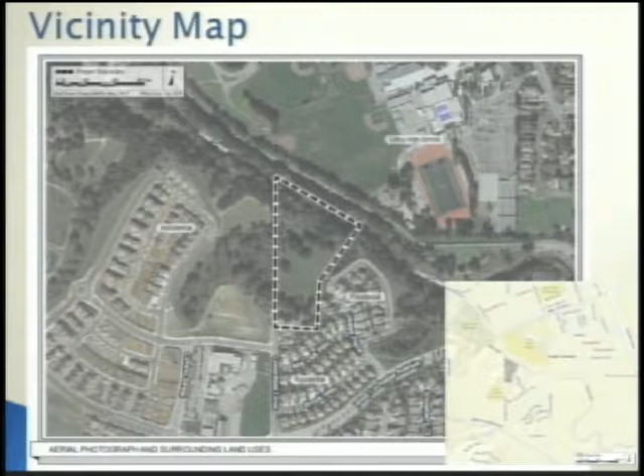The project's located just across the creek from Gilroy High School, adjacent to Villaggio Residential Development to the east and south. Glen Loma Development is to the west, as well as Christmas Hill Park, the Glen Loma Open Space, the new Sidney Castor Park, and Las Animas Elementary School.

The tentative map in its final development essentially represents what you see on the map on this exhibit, with 14 lots that start from Greenfield Drive into a private road, Greenfield Circle, a loop road with 8 lots in the center, 6 lots backing up to the Uvas Creek Preserve, and 2 large lots at the entry to the site. The 2 lots at the entry contain a large oak grove, and then you've got the Uvas Creek parcel and preserve, which is an important component of the project.

I want to point out that the net density of this development has been and remains 3 units per net acre. This is an 8+ acre site, which would have a potential net or gross density of 25 units, but given all the constraints, it was determined back in 2006 that with the sensitivities and the desire to preserve a lot of this site, 14 units would be an appropriate density, so the developer has worked to keep within the minimum density on this site.

I would note the applicant has worked very hard to promote the plan that they felt was the appropriate plan. Likewise, staff - planning, police, public works, and parks - have worked hard to try to get the plan to also recognize the importance of the Uvas Creek open space plan.

This plan provides 150 feet from the creek bank to the edge of development, which is certainly a positive aspect. The original proposal had the setback at approximately 85 feet, so we were able to work this back to a more appropriate setback, and we appreciate that change in the project.

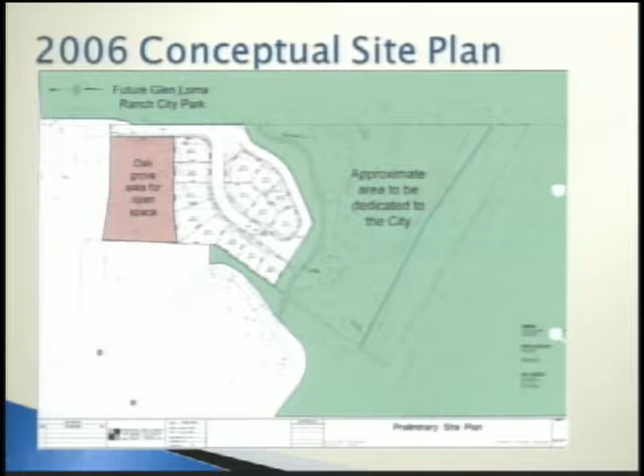In terms of the history, again, we had the allocations granted in 2006 for 14 clustered lots. That was a competitive process whereby the applicant had to compete to get these allocations. An application was submitted and then ultimately did not move forward.

In 2016, the current application was submitted for traditional R1 lots. And in 2018, in June, we took this to the Planning Commission with a recommendation for denial, and they recommended approval of the project. So staff moved forward with completion of CEQA and has brought the project forward to you tonight for an action.

Some of the pertinent policy questions that have been part of this analysis include the net density calculation - whether that is an appropriate method of calculating density for the site - and the concern with lots backing to the open space preserve. The Uvas Creek plan calls for one of two things: either a frontage road or a 25-foot setback buffer along open space and development lands.

The other is building envelopes have been proposed on lots 1 and 2, and 9 through 14, in order to protect the sensitive trees, as Christy had pointed out.

The other couple of more minor but important policy questions have to do with when we accept new lands, we have a sensitivity to the cost of maintenance. This does finish the Uvas Creek Preserve open space plan, so we're supportive of that. We appreciate that it includes a bike path, which we're very happy to have. The cost of maintenance is something the city tends to pass on to the developer in perpetuity, so the HOA would be required to be responsible for maintenance of the park until such time as the city may be able to accept it. The site also requires significant homeowners maintenance and enforcement of the private roads, the on-site drainage basins, and the areas behind lots 9 through 14.

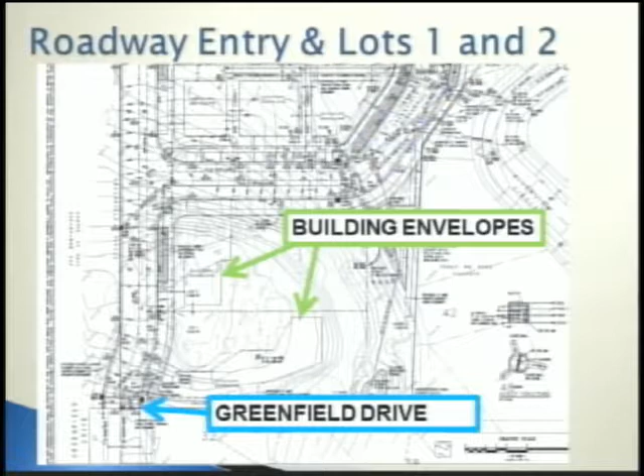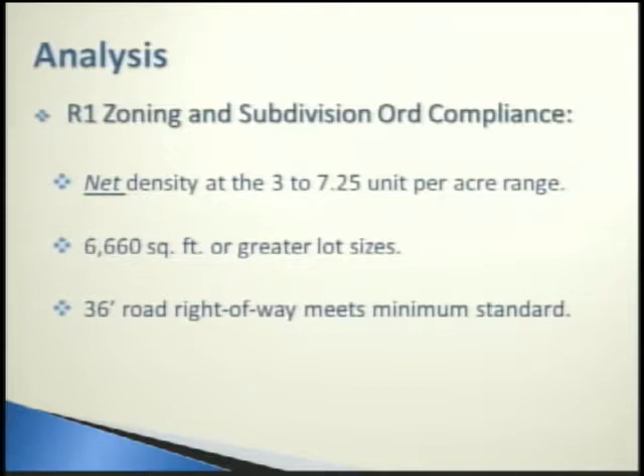In terms of our analysis, we've determined that the 3 to 7 unit density required in the general plan is satisfied based on net density given the amount of preservation proposed on the lot. The lot sizes meet the minimum 6,660 square feet, with the average size being 10,000 square feet. The largest lots are just under half an acre each. The private road, local street, meets the 36-foot road standard.

Also, it completes, as I said, the Uvas Creek plan, which is an important final piece that the city is very happy to have. I think it'll serve the community well, with a great bike trail running through it. The project has been subject to objective standards of review, and based on those standards, we found that with the conditions we proposed, we could make the findings required under the MAP Act to support this request, based on the recommendation of the Commission and the conditions we've identified for you tonight.

The environmental review essentially came up with a couple of very important aspects that need to be protected. The first is that 28 trees would be removed, after some modification by the applicant, which we appreciate, with replacement required at 3 to 1. Many of these trees will be removed with the subdivision improvements, so those need to be addressed at that time. Some may be removed with subsequent development of the lots, and those would be replaced at that time.

The retaining wall and fence behind the property, the double retaining wall, requires an open fence along that retaining wall in order to meet the objectives of our zoning standards, and the applicants agreed to that. As designed and conditioned, it's agreeable amongst both of us that it's a satisfactory proposal. The one thing about the retaining wall is that it's a common wall supporting many lots, so there's an aspect about that I want to go into before I close my presentation.

We did have one comment, from the Water District. They have property behind there and were concerned with drainage. We've addressed that comment and don't see any remaining issue with that. That's in your packet before you, so you can take action on the environmental document for this project as proposed.

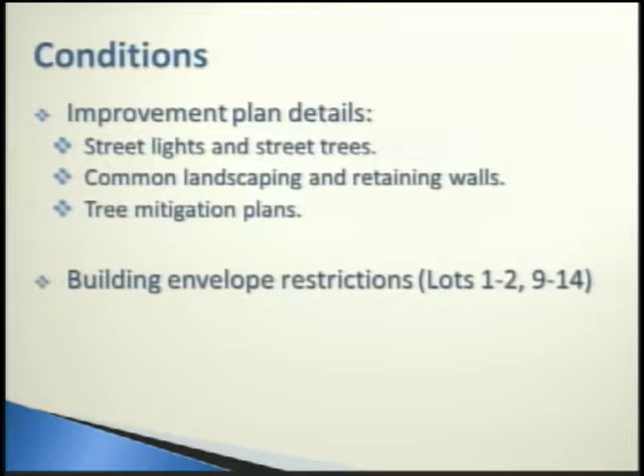The open fencing design along lots 9 through 14 is proposed by the applicant, but it's important to reinforce that by including it in the conditions. Staff also felt it's important to have an easement through the site.

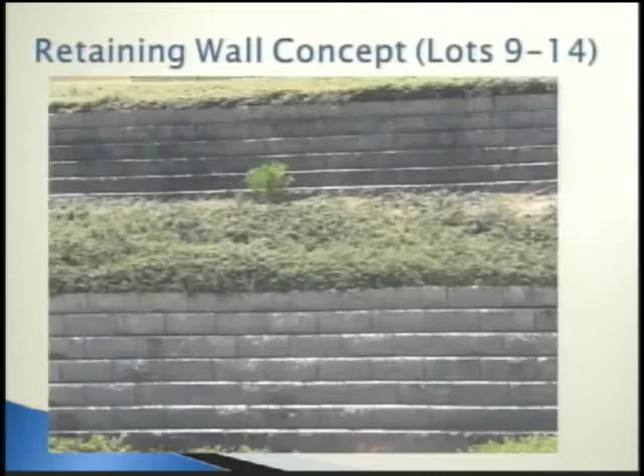There is a PSE, a public services easement that would go through the property, so it may just as well do the same thing, but we think it would be a good idea to recognize that formally. It is a private road. The applicant is opposed to that, but we think it's a good idea to have it.

Last but not least, we want to make sure the conditions clearly identify what the homeowners association's maintenance obligations are. We feel it's important to communicate that in the tentative map conditions so that when a developer goes forward with a final map, they understand what is required, and we can have CC&Rs that reflect those requirements.

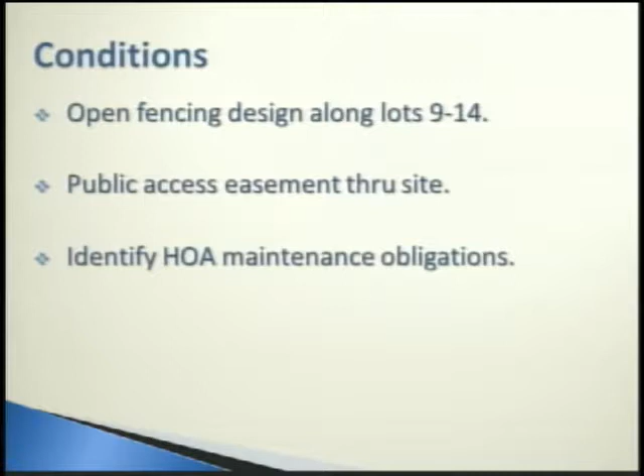So the options tonight are to approve the map with the conditions drafted by staff or with modified conditions as the council feels is appropriate. The council could choose to refer this back to the Planning Commission for further redesign, or the Planning Commission or City Council could deny the application.

Our recommendation is for you to adopt the resolution adopting the mitigated negative declaration and monitoring program prepared for the project, and approve the tentative map with the conditions we've recommended for this Greenfield subdivision project. That concludes my presentation. I'd be happy to answer any questions now or as the council finds need.

So, Craig, with regards to this improvement plan that needs to be turned in or submitted, you had talked about the retaining wall as part of that, or one of the items within that improvement plan. Is the retaining wall addressed at all under the conditions here? If it is, can you highlight it to me?

I believe it is. I'll need to skim through my documents real quick and locate that. Okay, so maybe after public comment, I'll give you time to look for that. And then also, you had mentioned the bike issue. I was distracted up here on the dais, so I want to follow up. What was the comment regarding the bike lane, or bike issue?

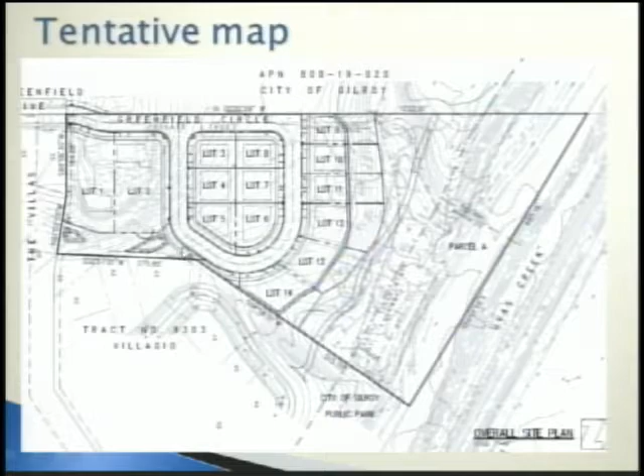So it's just a matter of acknowledging what's going to occur and asking for a public access easement to be formally recorded, so that we don't end up having to enforce a situation, with the city being brought into a conflict between these residents complaining about people crossing through their property.

The access easement would eliminate that. They cannot gate this. They cannot block access in any way. So it just, to us, makes sense from a practical point of view to maintain, to have that recorded.

So help me understand, this issue still has to get resolved? It's required as a condition. The applicant's opposed to it. So where is that condition at? 43, it looks like. The other one's 45. Okay, there we go, thank you. Yeah, all the special conditions are from 37 through 45, 46.

May I ask something on the same subject? How does that affect, though, the fact that these streets in this report, which I thought was very well written, by the way, easy to follow, the history, everything - but these streets are proposed to be private streets, right? Correct. Not city patrolled, right, like the way Eagle Ridge was supposed to have been in the beginning too. So how does having this public access affect the fact that the city has no responsibility to patrol? Well, that's, I think, a fair point and probably gets to the heart of what the applicant's concern is with having the public crossing private property.

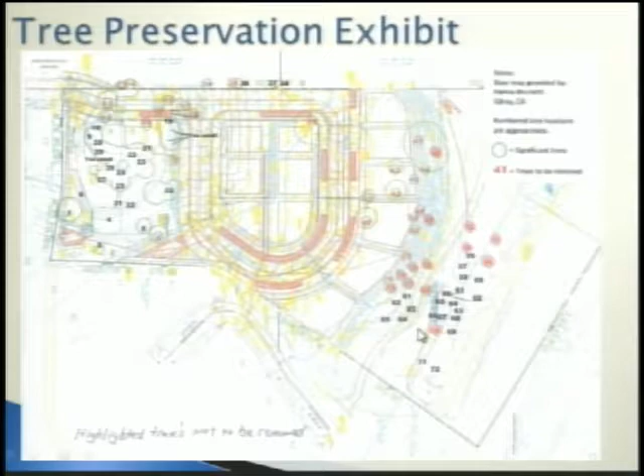I went out there and there's a lot of brush. The lot's pretty much overgrown with brush, and there's some dead trees and some laying on the ground. But I didn't see that many decent trees to save.

So how do you decide what's a tree that merits saving and just shrubs that should be taken out? We have an arborist report that's in the environmental document, and that went through and did an assessment. There are a number of trees that are in fair to poor to good condition. It's a broad range. We predominantly are focusing on saving healthy trees.

Of these additional trees to be preserved, this was a late change. We didn't go into detail looking at the quality of these, but they're in an area that's to be protected anyway.

The arborist report is what we rely on. If it ends up that they're going to take out some of these trees, we would look at them to see their condition and health. And if they don't warrant saving, they wouldn't have to mitigate. But it's basically, essentially, based on this arborist report that we have in your staff report, and that goes tree by tree and lists their value.

Okay, thank you. Thank you, Mr. Mayor. Councilmember Tucker.

So I actually have a lot of questions that I'll hold for public comment. I would like to hear from the public. But one question — I've been around a while, and I just don't remember seeing all these conditions on a tentative map, but one in particular is a landscape policy having to do with the retaining wall. And honestly, I understand the need for the retaining wall. I understand all the things that are majority of the conditions, what you're trying to do. I don't see any reason why you need to put a condition for landscaping.

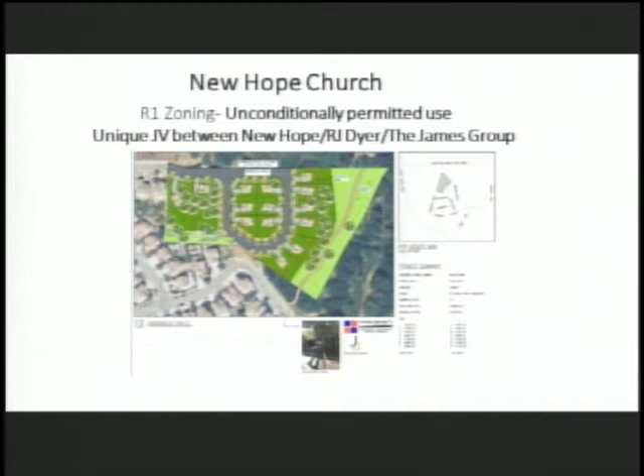We don't really have a problem with any mitigation measures in the neg dec. Neg dec and the tentative map are separate. So we formed a joint venture in 2015. We brought it in, John took it through a PRE-DRC meeting to get these kind of comments out. That was 3 years ago, so it took us a while to get here.

I don't want to be the guy that reminds you all that this is America and we have property rights, or that we all raised our right hand and swore to uphold the Constitution. But a big part of this country is our ability to develop our property and have full and fair use of it. The property has been owned by New Hope Church since 1979. It's always been zoned R1, specifically designed to comply with all R1, avoid the significant trees, reduce grading, minimize the environmental impacts.

This is the general plan language in support of the project: prioritizing infill development, the location of growth, urban growth boundary, economic development. This is a $12 million project. The city itself collects almost $1 million just in flat-out fees. 15% of our $2.5 million infrastructure budget is a plan check and inspection fee, plus impact fees of $750K. And all those dollars are locally circulated among local subcontractors, etc.

That's huge. James, I need you to wrap up, please. Excuse me? I need you to wrap up. You're over time, applicants are given 10 minutes. Roland, this has been 3 years in the making. You just— Hey, said no, staff, hang on. Wait a second, applicants are given 10 minutes. Okay, you're already a minute over. You spent quite a bit of time talking about Harvest Park. I'm going to give you another minute.

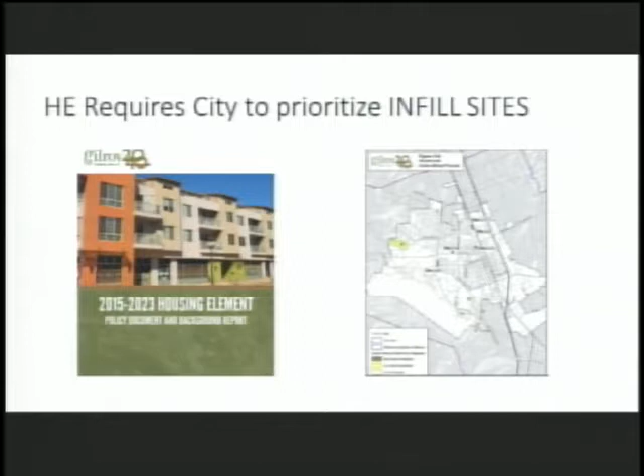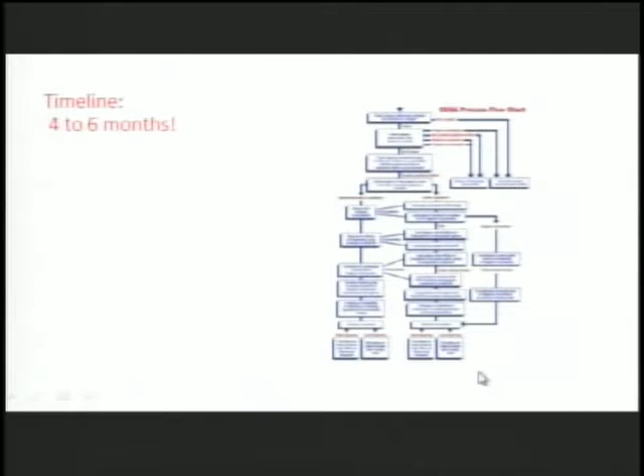Go. They failed to mention that this is in the staff report, under the housing element — it's a prioritized infill site. The project provides custom lots. They refused to process a CEQA application. They had a neg dec in their possession, an administrative neg dec, in November of last year, and failed to provide it. Timeline for CEQA is 4 to 6 months. The Permit Streamlining Act limits you to a 180-day review once the application is complete — not the environmental review, the application. It's deemed approved if no action is taken.

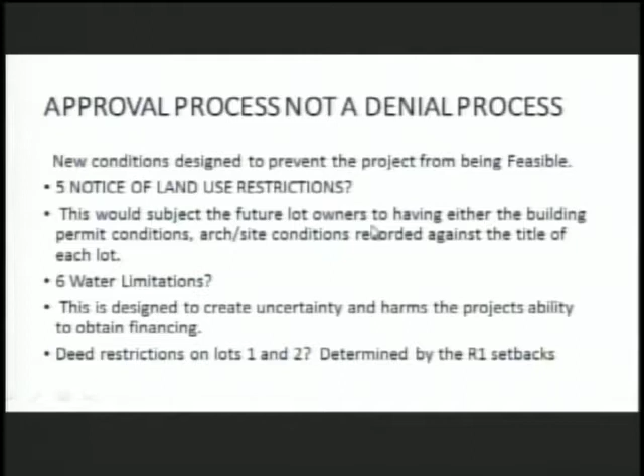Same thing with the State Map Act. It's 180 days. It's an approval process, not a denial process. We can get into the individual conditions of approval.

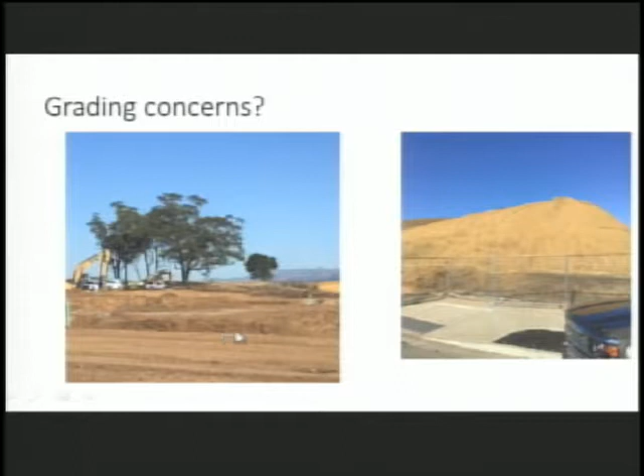Grading concerns, this is Glen Loma. This is the most intensive grading operation I think I've ever seen. They basically stripped this out 6 feet deep and then piled all the dirt up.

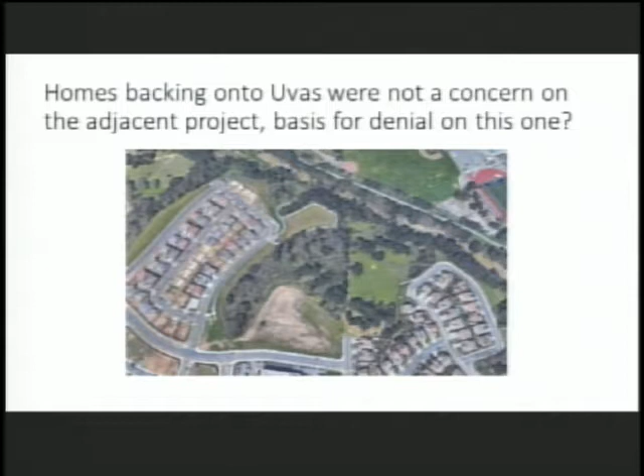The homes backing onto Uvas were not a concern on the adjacent project, but they are on this one. In fact, they're a basis for a denial, not even mentioned in the prior staff report.

How many plans? Nine. Nine plans. How's that possible, Roland? Design flexibility.

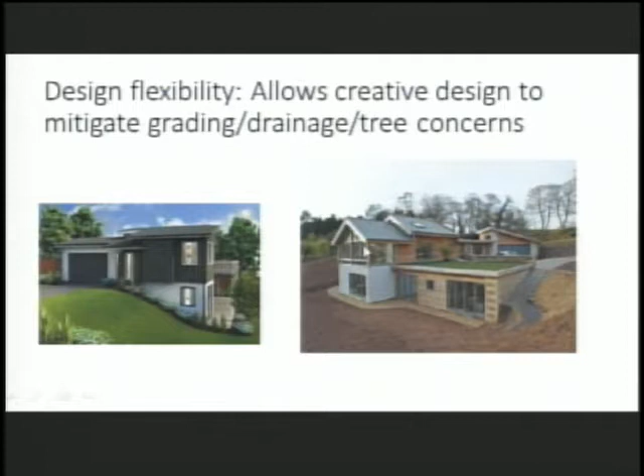If I can have some design flexibility, look at this. I can eliminate the retaining wall. The foundation wall for this house acts as the retaining wall. I can eliminate the retaining walls and save more trees.

This is what we could potentially put in there. It's assisted living, basically age-in-place architecture so that things are ADA accessible, and it's a 6-bed care facility, allowable under any zoning designation.

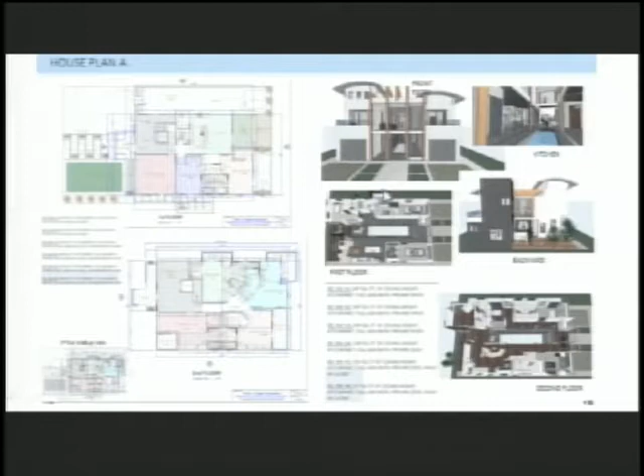There's an A, modern design. There's a B, there's a C.

So here's your top 3 reasons to approve. Hang on, James, hang on. Council, so we are at about 6 minutes for him. With your indulgence, I'd like to go ahead and give him a few more minutes to finish up your presentation.

So here's the requested actions. I want you to approve the map with the same conditions of approval that were given to the Planning Commission. I'd like you to approve the neg dec with the same conditions of approval that it was circulated with.

We found new conditions included in the staff report that were not brought to our attention previously, trying to expose us to wetlands that aren't there. And we want to do some kind of mandatory ethics training to prevent this from happening to future applicants.

This is unacceptable. All we're trying to do is get to a fair conclusion, and dragging us through a 3-year process, it's not working. And I would like to hear some more about this Map Act and the CEQA timelines, because the state puts those in place specifically to prevent this from happening.

What staff's saying is that if we don't agree with every condition that they dream up, if we don't allow them to design the project, then we can't even get to the city council, that they're just going to deny it at staff level. What does that say about your authority as council people? It undermines the entire process. I'm not the first applicant to say this. I just say it a little bit stronger.

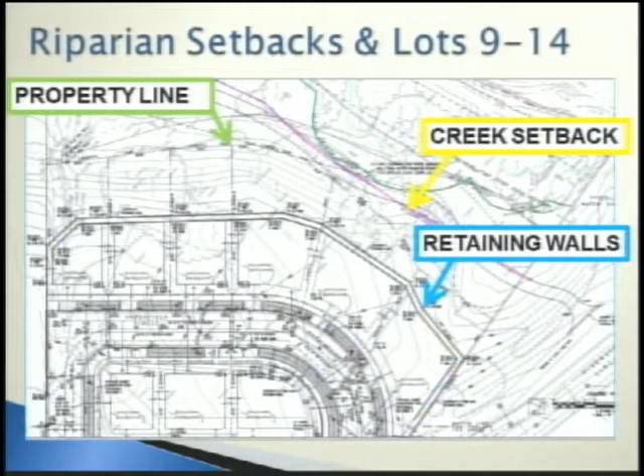Okay. With talking about the retaining wall, do you know what the applicant meant by foundations acting as retaining walls? I believe he's talking about eliminating the wall and stepping the houses down into this area. Unfortunately, no—well, perhaps he could explain it. No, I don't know what he means by that. Okay, and has it been something that you've considered? It's nothing that's been presented, so no, it was just presented tonight. Yes. Okay, thank you.

Okay, back to council. What is the will of the council?

Yes, at a minimum, I think conditions 5 and 6 need to change. Number 5 needs to refer to the expungement so that's clear when that happens, and number 6 needs to refer to the stage 3 drought declared by the state in order for permits not to be issued. So those would be my two.

So with regards to, clearly I'm saying that the expungement occurs after the tentative map, whenever it is, but make sure it's clear that when the city has signed off on the houses, this is no longer present.